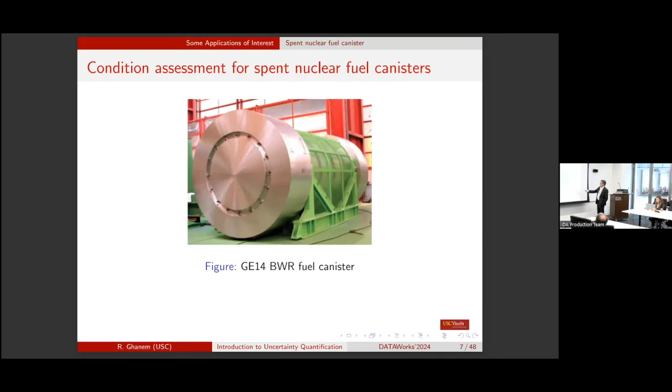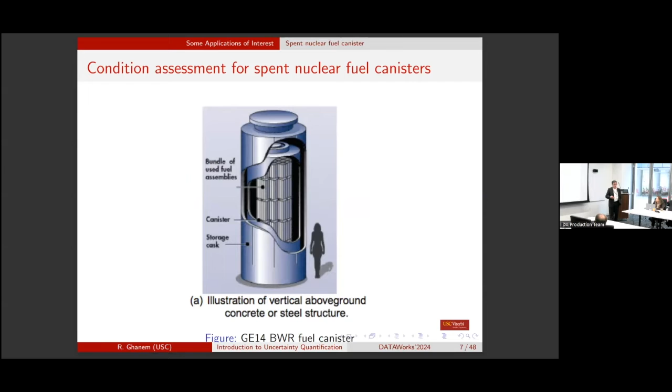This is a fuel canister for spent nuclear fuel. It's about this big. And while it's being transported, it's important to know, before it's stored in salt mines for the next 10,000 years, you do want to be able to ascertain its condition. What does it look like on the inside, right?

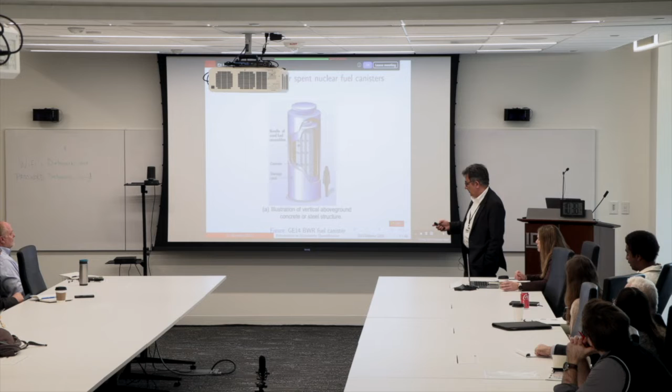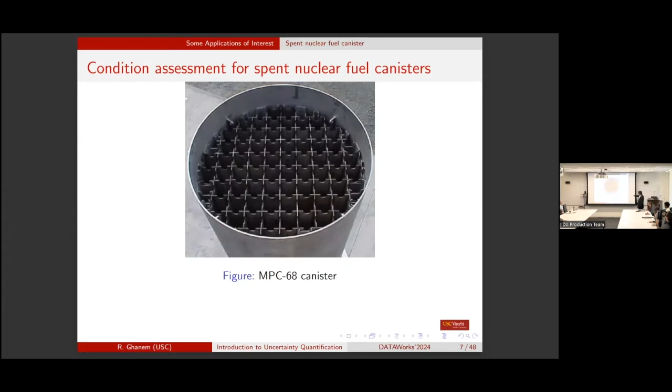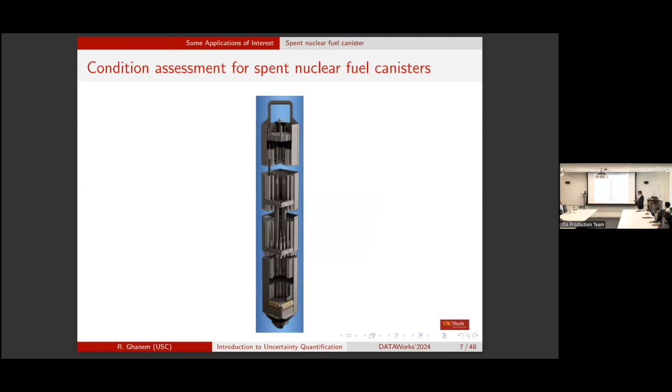This is what it looks like on the inside. This is the canister. There's this basket on the inside, and this grid here; in each of these grid cells, one of these assemblies is inserted, and each of these assemblies has about 90 fuel rods inserted in. Okay, so it's a fairly complex object. You cannot open it once it's sealed, but you still want to be able, after you've transported it, to ascertain the condition of what's inside.

Okay, so you could flip a coin, or you could go to school, get 2 or 3 or 4 PhDs in different topics, or you can listen to this talk. So this is one of the challenges that one has to deal with, that brings out uncertainty about many things, right? But we don't have time to describe those particular things.

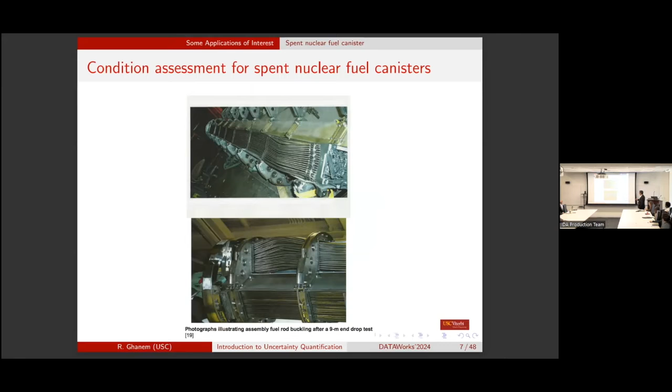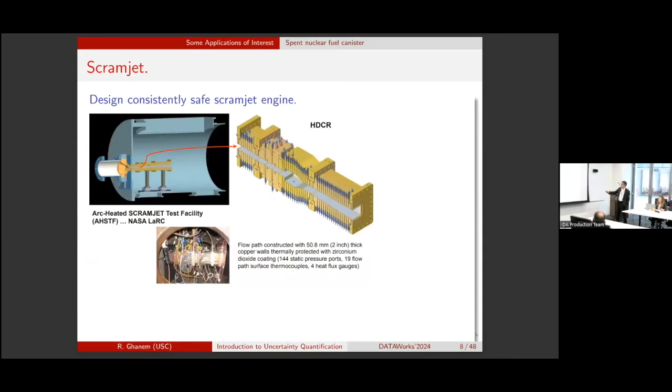But we see this on a computer. You never see this particular shape of combustion in a real engine. What you see in a real engine, this is an experiment, right? This is the model of the scramjet. Flow goes from here, comes out on the other side.

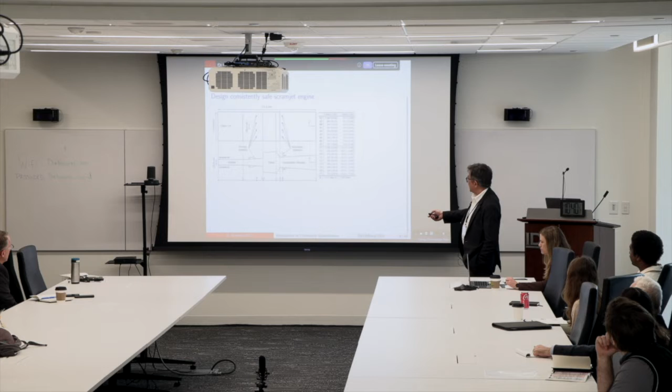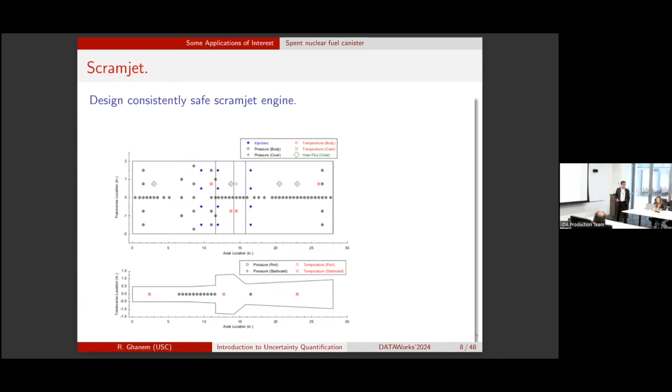It's instrumented with sensors at different locations on top. This is the top view of the sensor locations across and along the length. So we have a very finite number of sensors on the wall of the engine in an experiment. But this is what the flow really looks like.

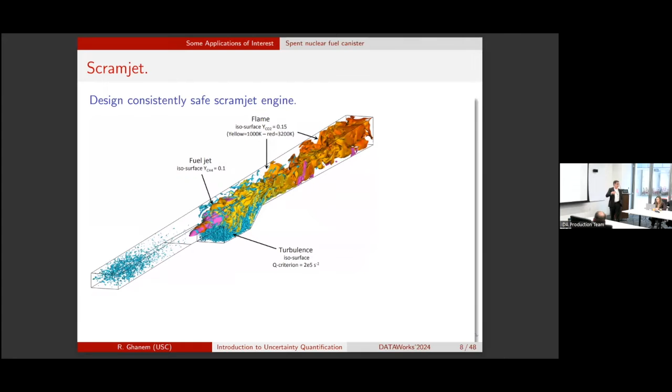And the danger of stalling, the danger of losing thrust, is related to something that happens on the inside, not on the wall. But the only access we have during an experiment is to the wall, right? And if you take measurements on the wall, then the measurements are never the same.

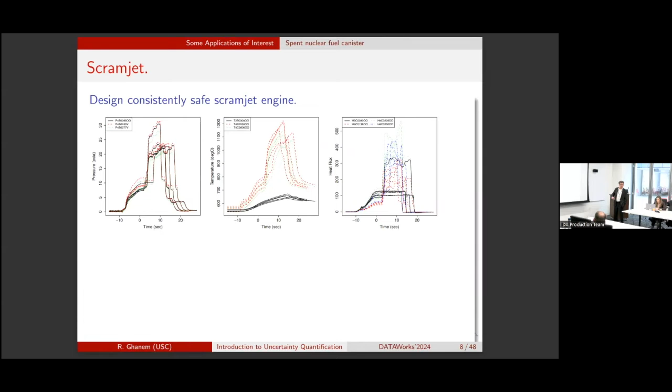There's a scatter in the pressure, temperature, and heat flux measured on the wall, right? So you don't have a single record to reverse engineer what's happening on the inside. There is uncertainty in the measurements you take.

And your objective really is to do a design optimization. You want to find the best shape and profile of the injectors for the engine so that you minimize the risk. So you want to minimize probabilities of bad things happening. You want to minimize the cost of running the thing, right? So you have probabilistic constraints, right, under very limited data. Your data comes from measurements on the wall.

Evaluating these constraints involves running computer models that have hundreds of millions of degrees of freedom, so they take a long time to run. So these are some of the challenges, and we know there is uncertainty. We don't have enough information, but even if we did, it's very expensive to implement any of that into our computational workflow, right?

So this brings the need for reduced models, for scratching your head simultaneously on the statistics side and the numerical side, okay, to enable this optimization under uncertainty, right? So you have one loop here for optimization, another loop for uncertainty, and then each entry in that double loop is extremely expensive.

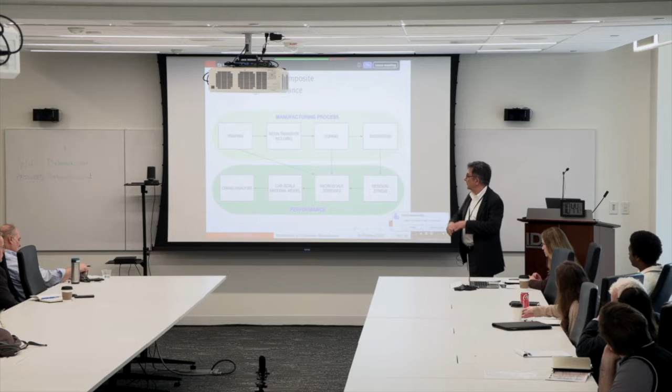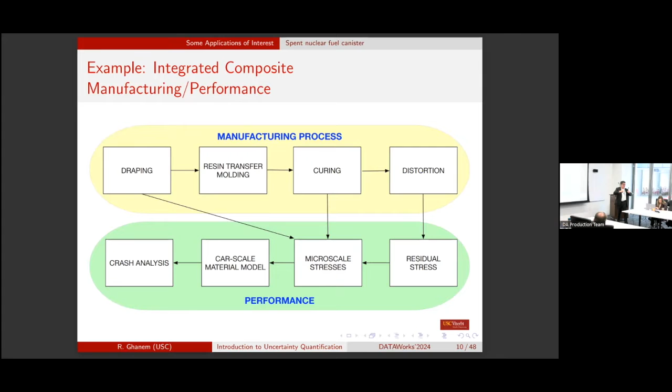And it is these variations that, as you inject this, the resin is going to sort of try to navigate around this heterogeneity and, as it hardens, it will create softer spots that will be magnified as you load the piece. Okay, so that's how the fabric gets. So that's again another source of uncertainties.

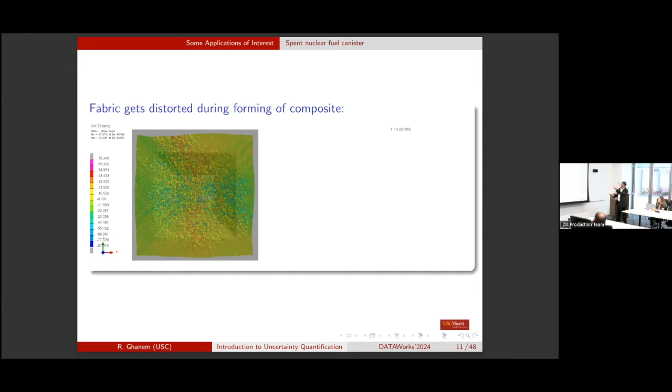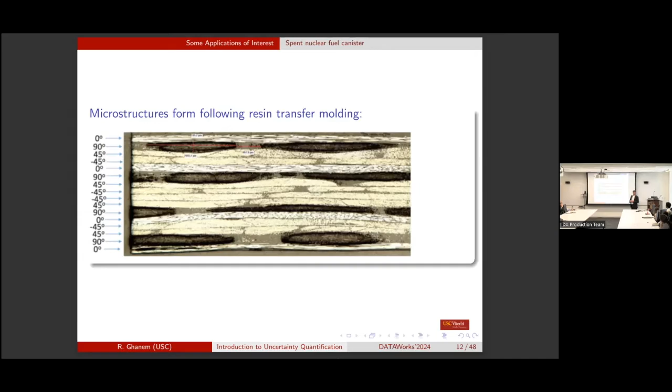And this variability is what has slowed down the implementation of composite material in products that are required to withstand significant impact or force. It's one thing to use composites for the hood of a car. It's another thing to use composites for the sides of a car where you can expect side impact, for example. Okay, so this variability limits the reliability of the products being produced. And understanding how to control it or live with it and mitigate it is important.

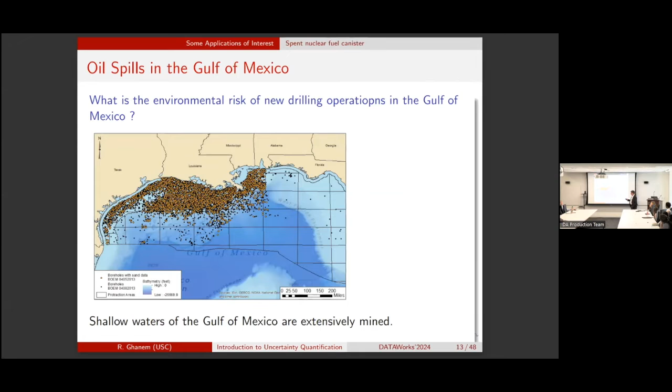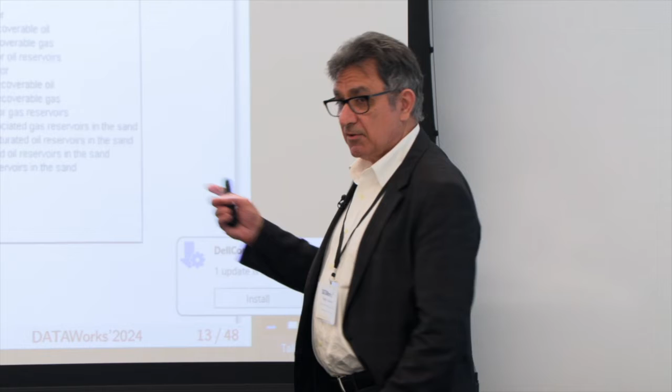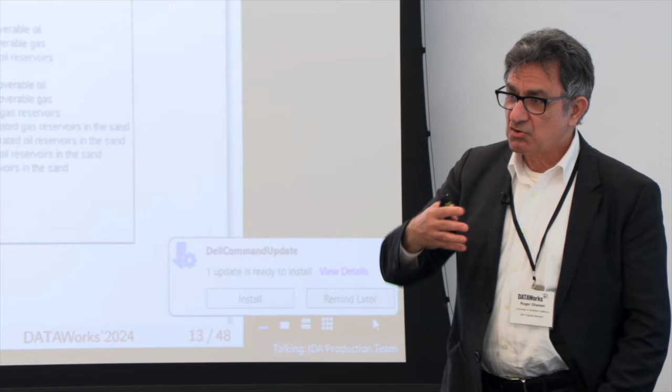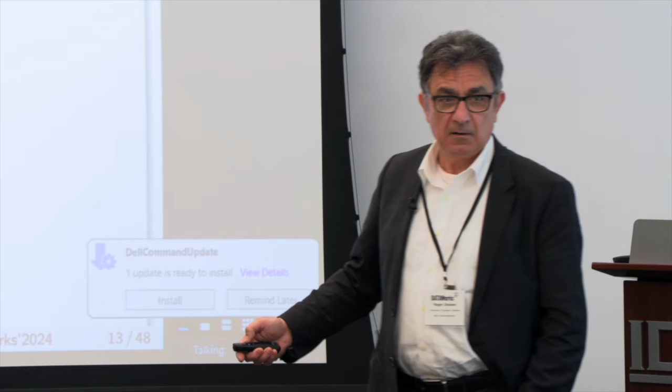The table describes the type of rock, the depth to rock, the depth of water, some geological properties, the color of the rock, things that may seem not very useful, but it turns out that they are extremely useful actually, because it's these additional variables that cannot be digested by a reservoir simulation code. It's those variables that really carry information about geological processes that allows you to extrapolate from a point here to a point here. But we will not get into that detail at this point.

But what's important in this particular application is, given that you have BOEM data at these locations, what can you say about the risk of starting a new well at this location? And these questions became very important after the Horizon, forget the exact name, explosion of 2010 or 2011. So people wanted to assess the risks associated with some of these explorations. And all they have to go on are data from existing wells.

But it's an important topic because, this is the shallow area. All of these are in the shallow water area. And so the shallow water area has pretty much been mined to death. And there's big interest in mining the ultra deep water area. Now, the ultra deep water area is the area over here. We barely have any data. Right?

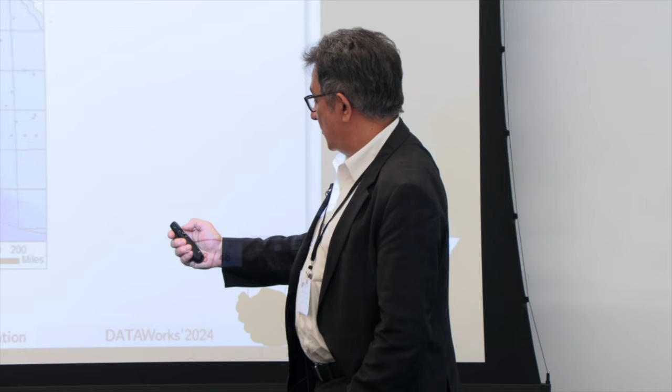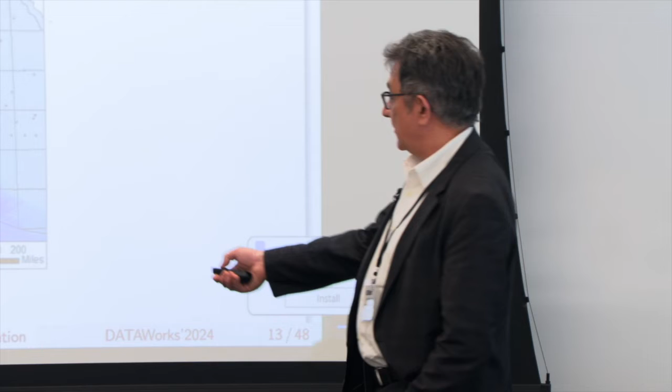So what do you make about mining here? What statements can you make? How can you assure, if you want to buy insurance, how would the insurance price mining in this area? Right? If you're the governor of Texas or Florida, how can you assess the risk to your coastline from mining activities at these locations?

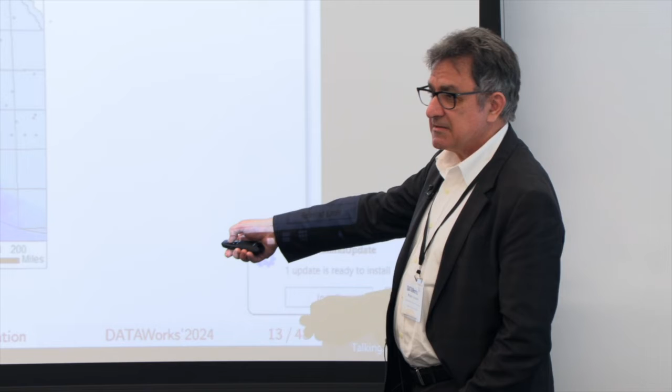Right? So the question is, this was a project we did for BOEM. What's the risk associated in mining away from this coast, given that this is the data that we have? Okay, now, when you first started this, I thought it was a big stretch. Of course, short of a rational answer, they have to flip a coin, because they have to mine in this area, whether we want it or not.

The question is, can anything we know about science, data, engineering be useful in helping, guiding them reach a better answer, right? Even an epsilon better answer would be very useful. Turned out actually we could do quite a bit more than just a tiny bit, and it all lied in the parameters here that we initially thought were useless.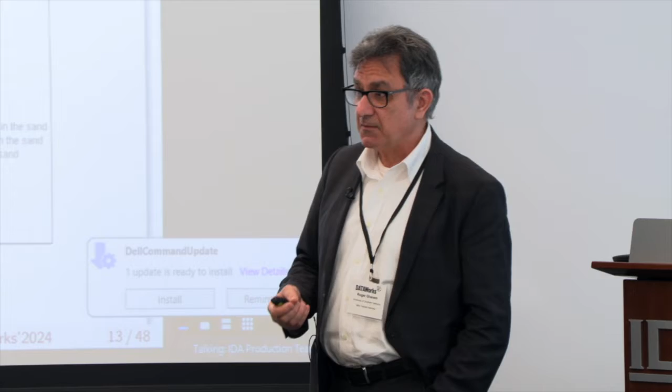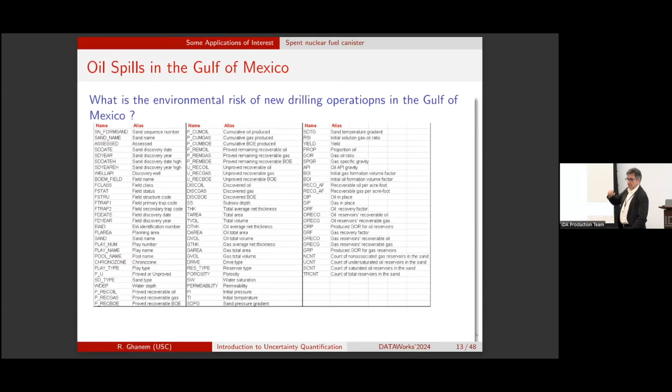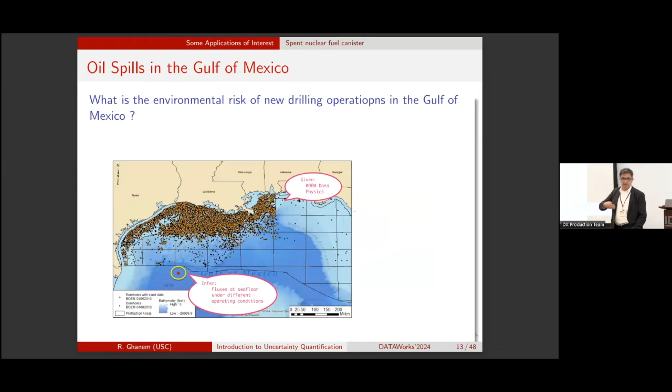Because it's those parameters really that encoded the geology that is not relevant to an oil company. An oil company cares about the immediate neighborhood of a well. And that's only 6 of these numbers that carries that information. Okay, so again, that's an important type of question. This question here is not about a bigger computer. It's about knowing how to read data. So it's actually about data science.

And of course, the cross section of the Gulf of Mexico does not look like this. Okay, this is a caricature of what it may look like, and the oil reservoirs are these yellow patches here.

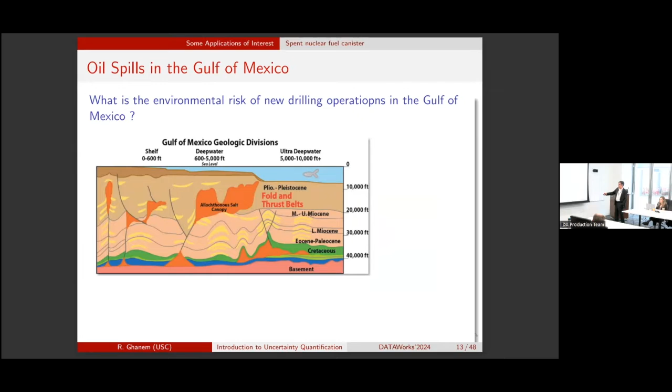Okay. Now another example is an example suggested to me by Kelly. This is Enceladus. It has jets of ice particles of water coming out of it, about 100 jets on the surface, and they know there is potential life in these jets. And JPL wanted to plan a mission at some point in the past, I'm not sure about the details of this, that intercepts the jets and comes back with 2 grams of stuff from the jets. Now, this is not on Earth, it's not on the moon, this is on Enceladus, it's the moon of Saturn.

Right, so you want to plan a mission that goes over there, intercepts the jets, and comes back with 2 grams of stuff. Many things could go wrong, right? The jets may have died by then, right? Or the jets actually change orientation. So there's big uncertainty. It's a very expensive project. Given who we are as humans, I think we will have to do this at some point, right?

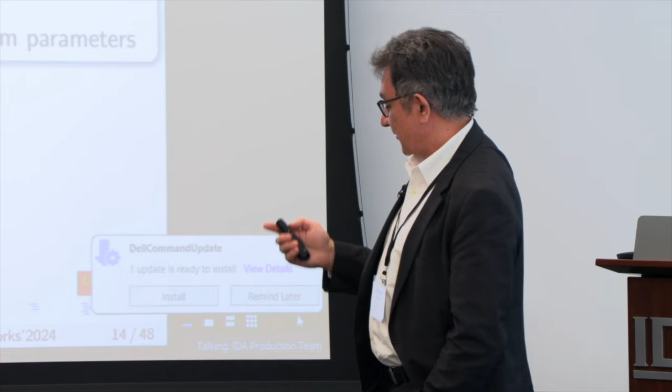But you can imagine the uncertainties in sending something over there to traverse jets that we know not very much about, and to come back with 2 grams of stuff. I mean, it's hard to imagine what 2 grams are, right? But these are problems that we are more and more frequently being faced with.

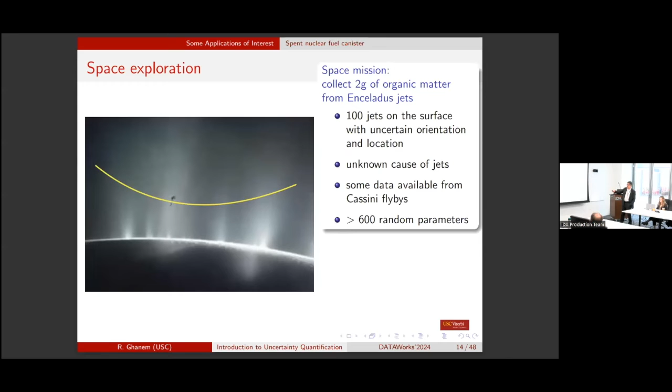Now, you take this, you turn it around. Now, instead of the jets going up, the jets are coming down, and you have a problem of plasma physics, right? So this is a jet of, we're firing plasma onto a substrate, supersonic firing. The distance is about that much. It's not planetary distances. And the objective here is to create a nanometer, micrometer scale layer on the surface of the substrate that would protect, this would be the inside of an engine, that would protect this during hydrogen combustion.

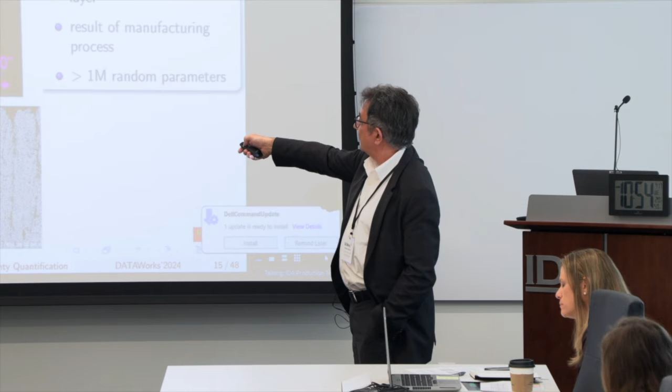And what you want is to create a layer that is very thin, that has some particular morphology, that has these columnar structures, because the columnar structure is going to protect the engine. It's going to actually facilitate the thermal management on the surface of the engine. Okay. Now, we don't know. I mean, you can imagine we have no control over where the particles of this suspension are going to land. It's highly uncertain. And it depends very much on how fast this nozzle is moving in this direction and the distance of the nozzle from the substrate.

Right? And if you end up with a cover that's amorphous, that does not have this columnar structure, it will not be effective at thermal management and at reducing the oxidation process in the substrate. So there are many parameters in this manufacturing process that will affect the life cycle of the engine as it's going through hydrogen combustion.

Okay. Again, the experiments are very difficult to perform. Not very difficult, they're time consuming, and we were able to, this is a collaboration with General Electric, we were able to have maybe 80 specimens. But the parameter space is much larger, is quite large actually. And 80 specimens barely place a point in that large parameter space.

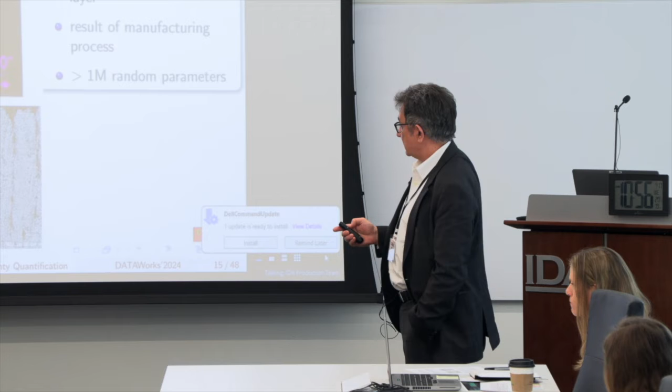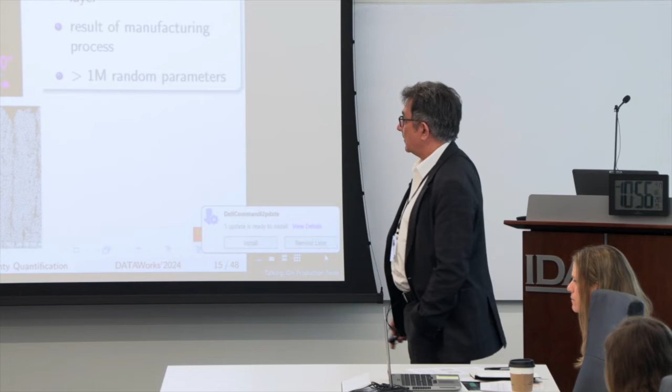So again, here the objective is to optimize the manufacturing process in order to lengthen the life of the engine. And in this case, bigger computers are important. More data is important because the computer models are quite wrong actually in most cases here. They're invariably missing some key physics ingredients. But they give us nice pictures. It's a good prior. Okay, good.

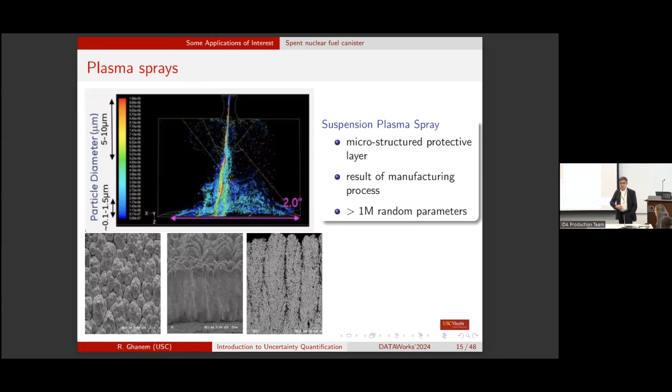So these are the examples. I think they cover a wide enough range to make you realize that uncertainty quantification is not about solving one equation with some random parameters or some random forcing; it's a wide space. The uncertainty comes in many different guises and forms, and the questions we care about are also very varied.

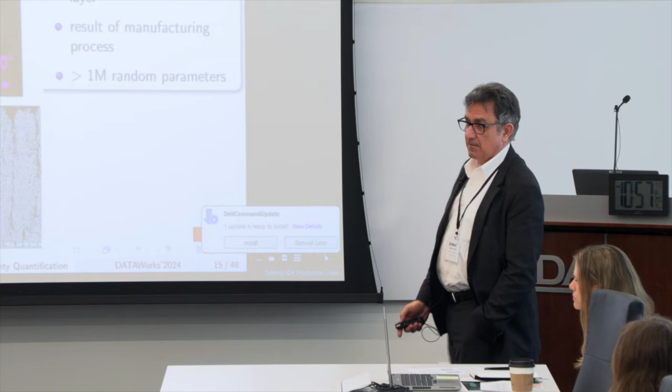So when you scratch your head and you try to think a little bit out of the box, it turns out that, so here I came up with another example, right? So you have hurricanes coming, you're expecting hurricanes, and you're an insurance company. You want to mitigate for hurricanes, right? So you develop, I don't want to scare you, a sigma field, right? A set of events. These are all the possible hurricanes that could come, right? You're an insurance company, so you are planning for future hurricanes. So these are all the possible hurricanes that could come.

And these are all the possible combinations of insurance claims, right? One of those will happen, not all of them. But you don't know which one of them will happen. And you don't know which one of these will happen. But this is really the setting that we like intellectually to think about. There are things that will happen and things that we care to mitigate. Okay? These events we can observe, and events we care about.

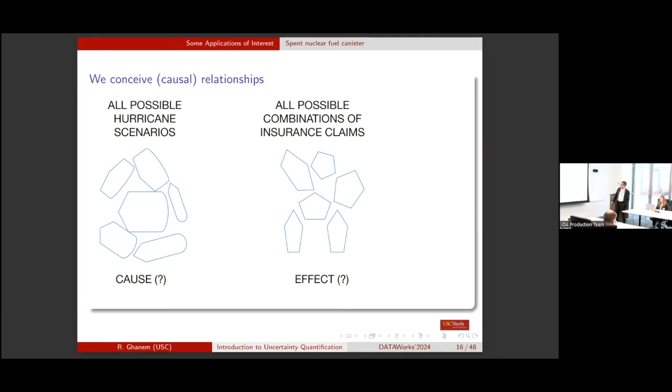Now, very often we invent causal relationships between the hurricanes and the cost, although there may be some other effects that play a role here, right? But these events have not changed. Now, what we add to the mix is we try to think about some relationships that map these events to those events, right? For example, a hurricane comes, we have a certain number of steel buildings, concrete buildings, wood buildings, and you have maps like this that tell you what to expect, or the hurricane has certain wind speed, and it affects different types of buildings of different elevations differently, and that helps you develop some map from here to here and back. So we add this to the list of events we care about, right?

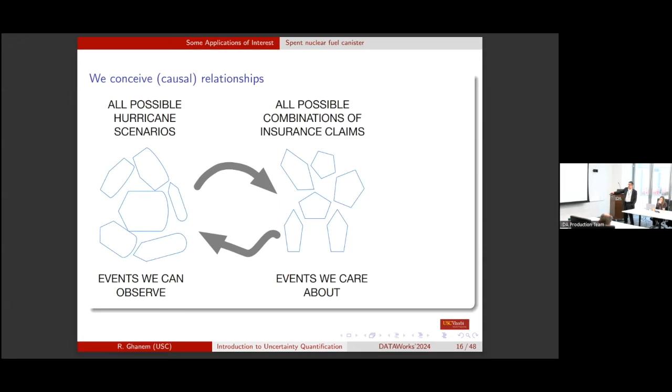But it's still a very complicated map because these events are very complex, and those events could be even more complex. So what we do is we add a mathematical suit, if you want. And instead of the real events we care about, we create a grid, mental grid, if you want, of events we know how to deal with, right? We put ourselves on the real line, for example, or in some Euclidean space, and suddenly we have a grid here and a grid here.

But by putting the grid, by grid I mean we limit the set of events we want to consider. We eliminate things, and these are not tail events. These are things we are no longer going to consider. They are completely out of scope of the models we end up dealing with. Okay? And those could be very important events that you have ignored. But we almost never consider these things that we left out. And we end up mathematically dealing with nice sanitized models that we call mathematical models that we work with. And this is the starting point for most of the research and technology and everything we do in uncertainty quantification.

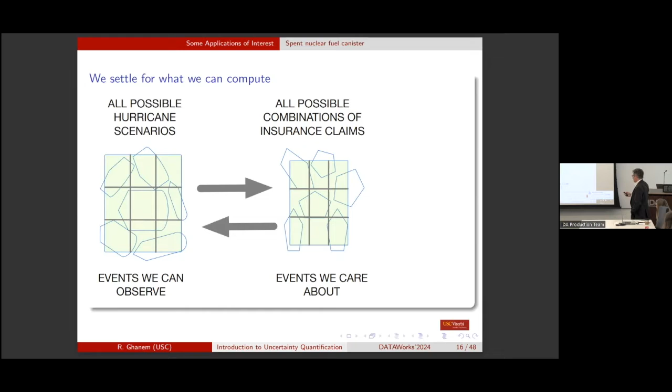Now, there's hope with new paradigms in AI and machine learning that have not been corrupted by the way we do things, that maybe they will pay attention to some of these things because they are not limited by the Cartesian way of thinking that we tend to follow. But we have not started that path yet. Okay, good. So I think these are important challenges if you're trying to deal with problems where the consequences can be very significant, right? The things that you omitted from the book.

All right. Sorry. I tell my students we're professors, we love to talk, and sometimes I forget the time. We're still good on time.

So a modeling perspective. So given everything we've described, let's think a little bit about some modeling challenges. So we'll come back to this. Okay. And I call, given that you fix the model, right? If I'm interested in bending this, and I want to know under what force I'll break it, right? I can describe it using a beam model, which is the simplest model I can come up with, right?

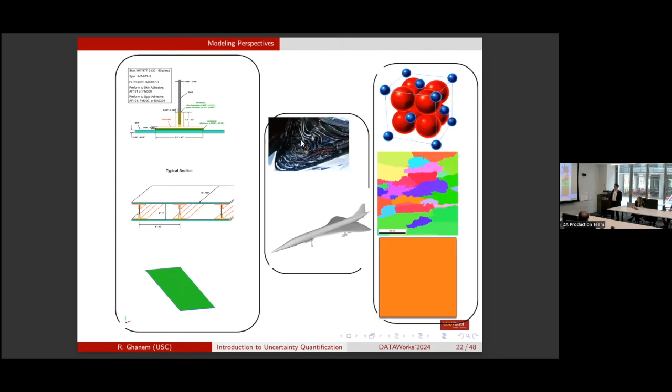So from this, we observe one important thing. It's not just uncertainty that is not a property of things. Mechanical properties are not properties of the material, but they are properties of the model you have of the material. If you change the model, your list of mechanical properties will change. So apparent randomness in these properties could reflect deterministic subscale variability.

Again, this is similar to saying that the randomness in the coin flip is simply because I was not looking at whether I had a head or tail to start with. The subscale variability for the coin flip was adding more observations about whether I start with head or tail. And if you want to add more subscale variability, then you observe the coin rotating in space. So as we add more information, we're looking at subscale in many cases.

Okay, so uncertainty in the parameters could be due to either modeling or to specimen variability. And it is this interplay between scales and uncertainty that leads me to think that the separation between aleatoric and epistemic uncertainty is not very constructive, not in an engineering setting at least. Aleatoric uncertainty refers typically to problems where you know the model, but the parameters are random. And epistemic uncertainty typically refers to problems where your knowledge itself is uncertain, and your model itself may be variable.

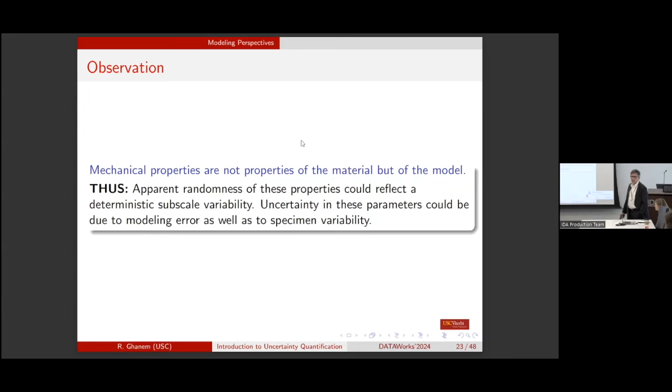You have distortions that you have to describe. You have advection, you have diffusion that you have to describe if you're trying to describe how a real mass is governed by physics. So probability laws are much more forgiving than physics laws. As long as you're not violating these two things, which are very hard to violate, you're fine. Okay? So we have a lot of flexibility for modeling with probabilities.

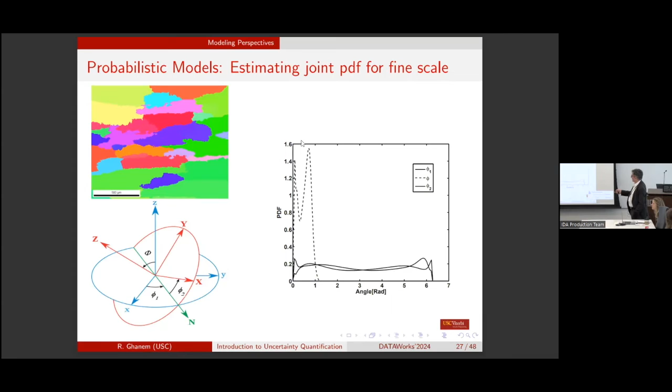Then the behavior on the coarse scale depends on what happens at the micro scale. To characterize these variables, I would have to perform experiments at this scale to characterize the distribution of those finer scales, which would involve computing the Euler angles, the orientations of the crystals within each of the grains. That would give distributions like these. Here I'm showing just the marginal distributions, but from enough data you could plot the joint distributions of the 3 Euler angles, and that would give you the distribution of the etas.

And f in this particular case is again something similar to Newton's law. You have conservation laws that relate what happens at the small scale to what happens at the big scale. Now, this here is not a challenge. This is a silver lining for many problems.

And that is that, even though we know how to characterize things at the atomistic scales with billions of degrees of freedom, in most cases the things that matter are very simple. We may have 3 or 4 or 10 of them, much simpler than the way atoms and quantum states move. So in many cases the quantities of interest are very low-dimensional on the coarse scale, and the analysis at the fine scale exaggerates the complexity of the problem. We end up solving complex problems just because we know how to do it.

It has always amazed me that many climate simulations have very heterogeneous pictures on the globe with things moving up and down, and at the end, the plot that makes it to the reports is a simple plot. It goes up like this. So if one cares about a simple result that behaves in this fashion, there may be more efficient ways to deduce that.

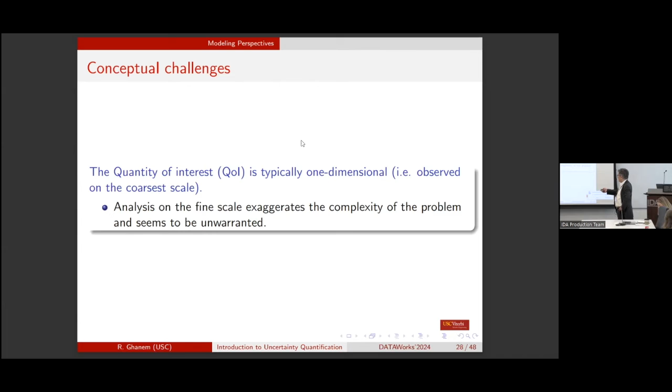Okay, and we do have some time to, I'll be getting back to that in a little bit, actually.

All right, so another observation, this idea here of writing k as a function of etas, it's something that most of you have seen in your elementary class on probability, right? You're all familiar with chi-square distributions. A chi-square distribution says that a chi-squared variable is the sum of Gaussians squared. You're all familiar with a t distribution that says that a t random variable is a particular function of Gaussian variables, a ratio of a Gaussian to a chi-squared variable.

Okay? So we do have forms like this, simple forms, squares, finite sums, ratios, that we work with on a regular basis as part of standard statistics. But what we need to do now is be able to generalize this away from that limited list of tabulated distributions to problems where the function f is really problem dependent and describes the physics and the data of the problem.

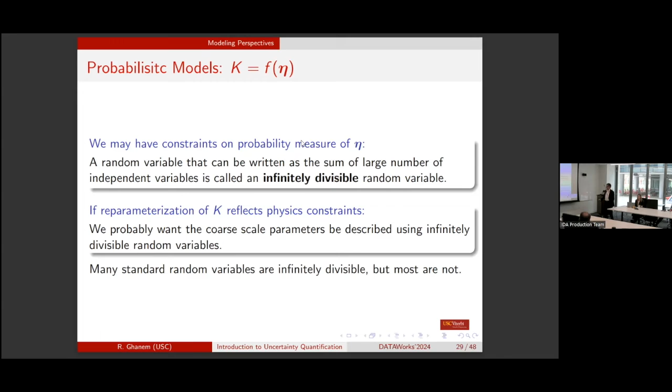Infinitely divisible distributions. This says effectively that it's not physically realizable to think of a material property as having a uniform distribution, because uniform distributions are not infinitely divisible, and most material properties are really the aggregation of things that happen at a finer scale. So if you were to test material properties in a lab, you will always observe a tail for those distributions. They will never have a sharp cutoff like this. But you can reach a similar conclusion based on more logic-based arguments as opposed to experimental arguments. Okay, good. That's all I have to say here.

Okay. So we're going to move now into a few specific constructions that we've worked on in the past few years that leverage the challenges and perspective I just described for you. And these probabilistic or uncertainty models leverage structure and the data and the physics for describing uncertainty. And I'm going to talk about 3 different classes of models. One is switching diffusion. So the other one is polynomial chaos expansions. And the third one is probabilistic learning on manifolds. So now we're going to get a little bit more specific with the technical approaches that we try to pursue.

So switching diffusion, the idea is very simple. The idea is that there's something happening on top, right? And one is justified in thinking that every now and then there's a different dynamics that happens on top. And the cause of this switching between these dynamics lies underneath. We don't see it. So every time something underneath switches colors, something above is switching behavior. Okay. Now this is typical of hidden Markov models, for example, except the difference here is that there's a relationship between what happens under here and what happens above. So they're related to each other.

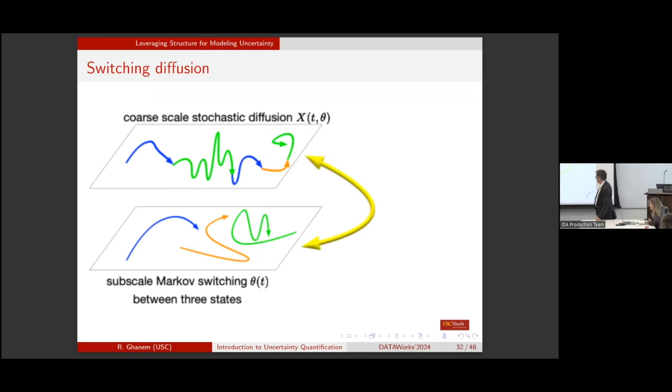But the thin slice still lives in the big cube. It doesn't live in a small cube. It's a thin slice in the big cube. Right? Feel free to follow up offline. Okay. Good.

By the way, an equation like this, you can always build an equation like this, where mu is called the drift and b is called the diffusion of this equation. You can always build an equation like this with some mu and some b, so that as x evolves as a function of t, x has a distribution that matches the data that you are observing.

So if you give me any data set that you have, as long as it does not have infinite memory, I can describe that data set as a solution of an equation like this by estimating proper mu and proper b from the data. Okay? This is called an Ito equation or stochastic differential equation.

Now, this equation may end up having to lift very heavy weights if indeed these parameters depend on another process. And if you were to extract this process from this equation and put it in a separate equation, then this equation will be running much more efficiently. It will not have to do as complex a task.

So this here is a computer model, for example, that aims at describing this curve here. And this red curve are the states of alpha. So here we have alpha 0 is in this zone, alpha 1 is in this value of strains, and alpha 2 is in this value of strains. And this is the corresponding x. Questions? Okay. So, and this is the coarse scale f.

Right? And once we have this model for alpha and the model for x, then we can generate millions of samples. Solving this equation is very straightforward. It runs very fast, in microseconds. Right? So once we have estimated these parameters from training data, we can generate millions of these samples that describe the behavior at the coarse scale in a fashion that acknowledges what's happening at the fine scale. So it already encodes that behavior internally.

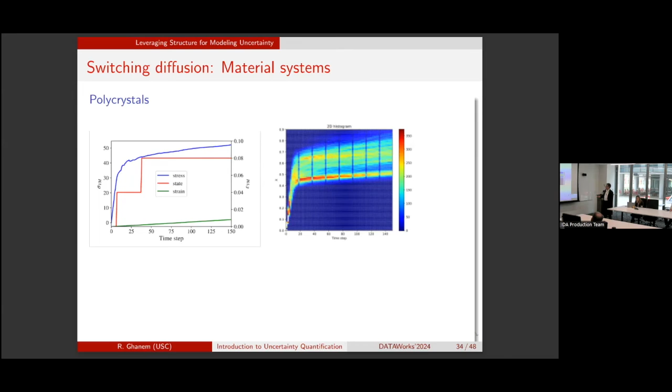And there's some type of oscillation that when you observe is a precursor to unstart. Unstart means the engine dies. So when these guys start to oscillate in a certain regime, you know that something bad is going to happen. But of course, you cannot see this inside a real engine. The only thing you can sense on a real engine are measurements made on the surface. Right?

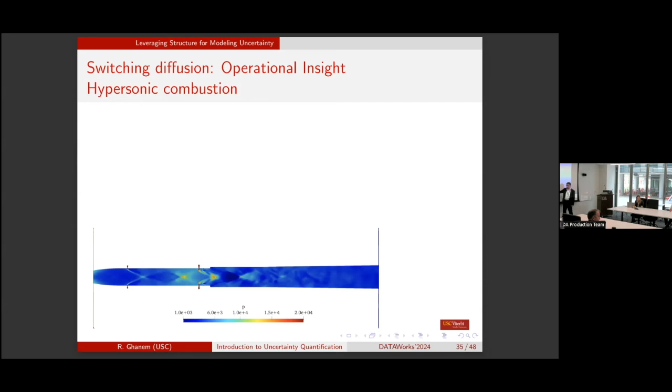So one thing we're working on now is to describe the measurements, sparse measurements on the boundary that we can take during an experiment, as our X process that we can measure, and what's happening in the center as the alpha process, as you switch between different regimes of behavior. And the question is, by observing X, can we infer the alpha? This goes back to this problem here. By observing this, can we infer how much damage is happening

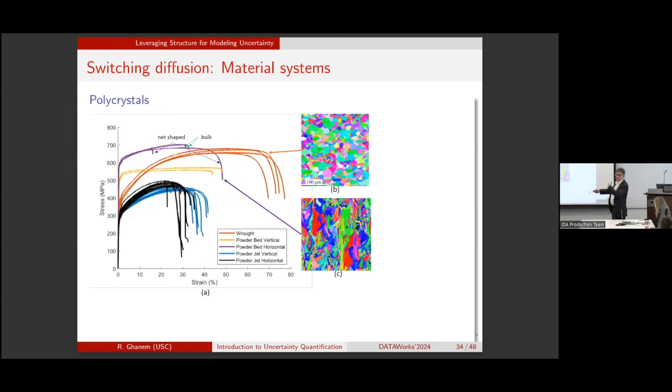inside the material? Translating the same question to this problem here, we want to observe the measurements on the boundary and infer the regime of behavior along the center line. Because we know from experience, from having looked at many simulations, that certain regimes of behavior are associated with failure. Okay. Good. Questions?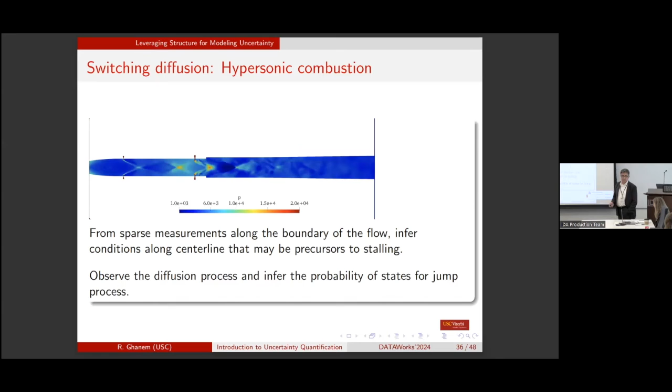Okay. So this is currently an active research area. And this work, by the way, the switching diffusion, was supported by the Air Force, and now it's supported by MURI, also from the Navy.

Active research areas are to switch with a large state space, where what's happening at the alpha state can be in the hundreds of possible states instead of 3 or 4 or 10 states. We are interested in situations where the diffusion model is not just a vector of entries, but is a matrix, has matrix values.

Because, for example, elasticity properties are described as tensors, as matrices. And other quantities also of interest are described as matrices. And we want to condition on what's happening on top and infer what's happening underneath.

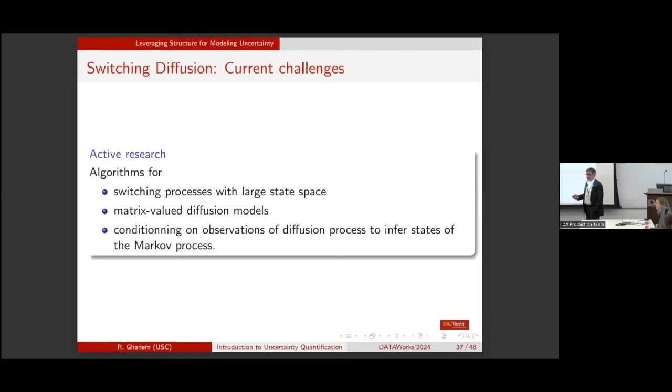Okay. Now, so we're done with the switching diffusion model. The other model that we're going to look at is polynomial chaos models. Now, I started working on these some 35 years ago. Every time I try to move away from them, I get pulled back with new ideas, and they have been the workhorse for most of my research, and they've proven to be very resilient.

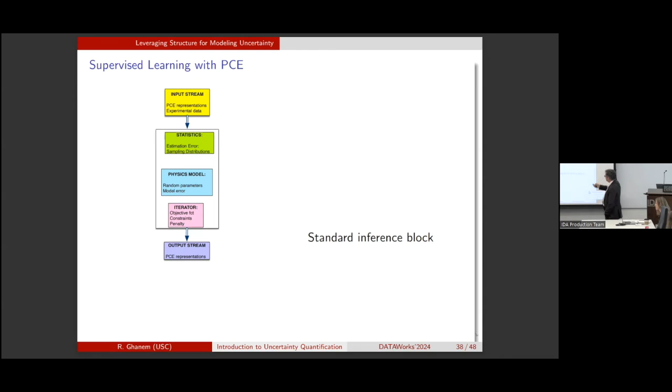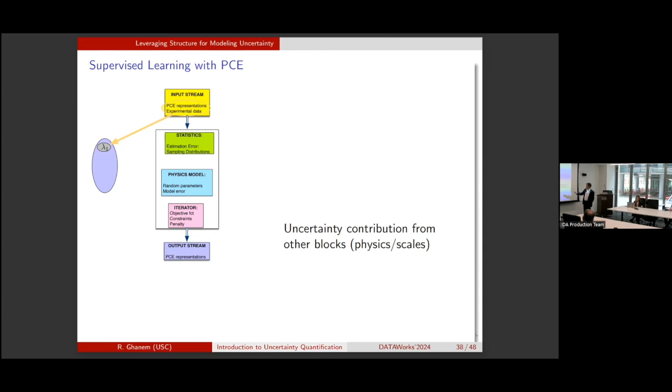So first, the input stream you bring in may have some uncertainties associated with it, possibly because the upstream model itself gave you an ensemble, right? So that brings in one, I call it a stochastic degree of freedom, or one set of degrees of freedom associated with the input stream. Then you do statistical estimation. Because you have finite samples, this brings in another degree of freedom, right?

We all know, for example, that if you have n data points and you estimate the mean of the data points, then the mean itself is a random variable that has a Gaussian distribution, and its standard deviation varies like 1 over square root of n, right? So you have here now a random variable whose strength or contribution varies like 1 over square root of n. Right? So when you do statistical estimation, you're adding uncertainty in here.

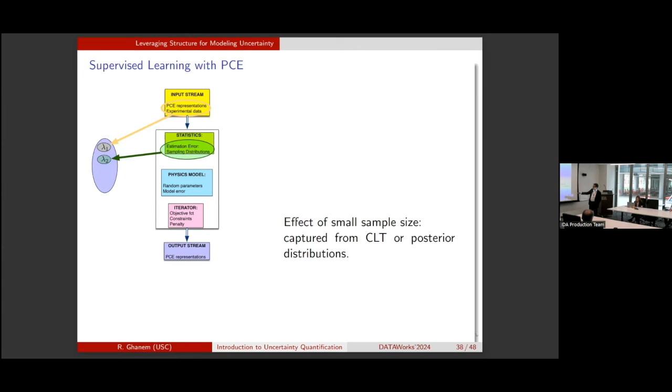Then you bring in a physics model, and the parameters of the model can themselves be random. That adds another degree of freedom here. And you may have model errors associated with the physics model that bring in yet another degree of freedom in here.

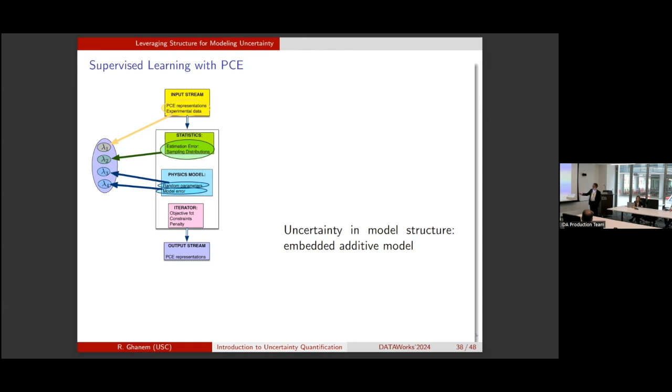Okay, and your output stream then is going to depend on the uncertainties in the input, the uncertainties that you incurred doing statistics, that you incurred with random parameters and model errors. I call all of those Xi, and the output then depends as a function of Xi. And what we want is to be able to describe in some constructive way, some useful way, this output stream as a function of Xi.

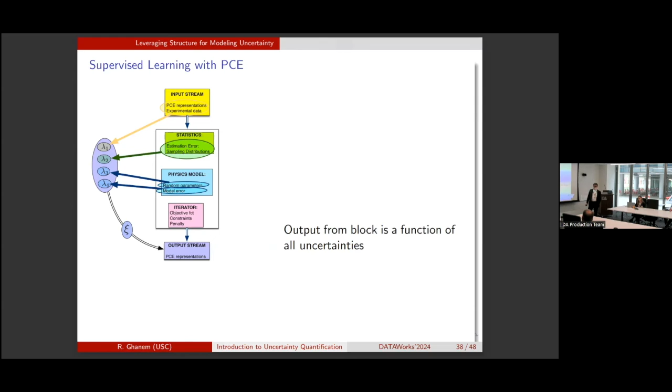Okay. So these are the stochastic degrees of freedom. And quite often, actually, the physics model is not just one model, but it's a network of models. So you collect these stochastic degrees of freedom for all the models, and you put them in a reservoir of stochastic degrees of freedom in here, right? And the quantity of interest is Q, right? So that's how it works.

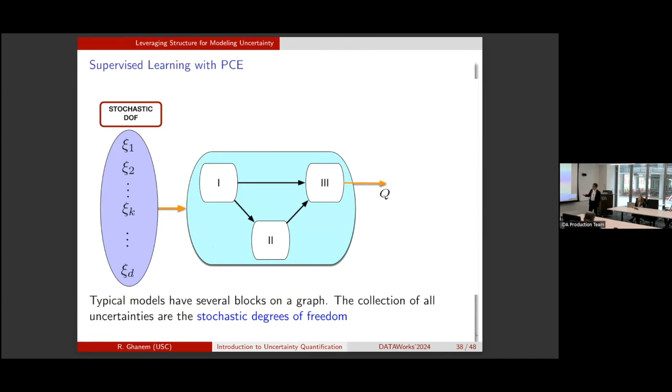Now, I'm going to replace this block here and a little bit more. If you actually try to implement this, what you discover is that first you take these stochastic degrees of freedom and map them into an input deck for your simulators, right? So these are the input parameters that go into the input deck of the simulator. And these input parameters get mapped through whatever simulations you have to quantities of interest, right? So this path here, going from these degrees of freedom to the parameters P to Q, is the path that follows physics, whatever simulations you have.

And you can call this the training set. What you want to end up building at the end is a map that takes you from these directly to this. Because this map is the map that you will use in solving these very expensive optimization problems. Right? This map here, every pass through this is going to require you to build the input deck and solve the physics problem. This path here, once you've calibrated this path, completely bypasses the physics.

Okay, so in today's language, you can think of this as a neural network model, perhaps. But for many of the applications we run with, the requirements are about 0.1% accuracy. We cannot afford the 10% accuracies that you achieve with neural networks, right? So this learning process has to be very meticulous. Okay. So this is what we want.

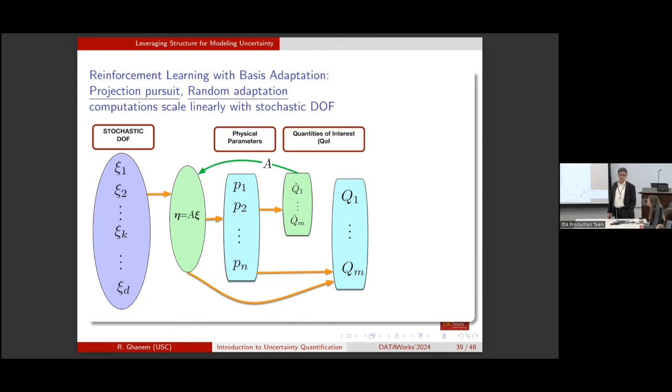Okay, good. So the last component of the work is probabilistic learning on manifolds. And the first time I worked with this was on the problem of the oil wells in the Gulf of Mexico. Actually, about 10 years prior to that, maybe 15 years prior to that, I had met

Yannis Kevrekidis, who told me a little bit about diffusion maps and work he was doing on diffusion maps. And it took 15 years for me to understand what he was saying. But eventually it clicked, and turns out that those 200 parameters in the table that I showed you, from one table to the next, to the next, to the next, well, if you look at them properly, they do delineate some structure in 200-dimensional space. They are not placed at random in 200-dimensional space.

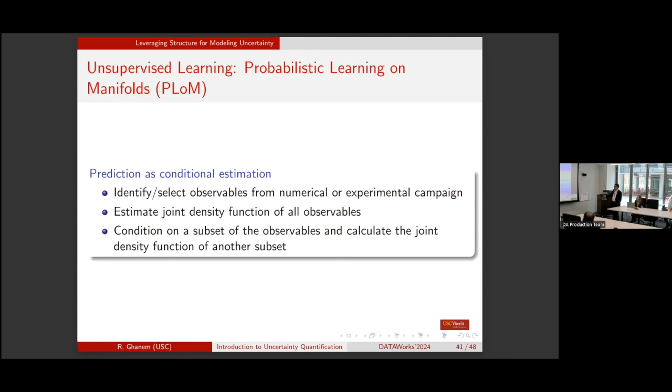So prediction as a conditional estimation. So what we want is to identify, select observables from a numerical or experimental campaign, estimate their joint density function, okay, and then say, if I knew the value of one of them or a subset of them, what can I say about the other subset? Right? That's standard. Right? The challenge is, in many cases, the data is offered to us in this form.

We have a table where each row is an experiment, a sample, and each sample has that many features, number of columns. Okay? So you train on a sample, and then your objective is you break the number of columns into 3 groups, at least we do. One group, W, are values that we can specify during operation. The Q are values we want to predict during operation.

And the U are values that we could only observe in controlled settings. We don't care about predicting them, and we cannot observe them, right? But they are valuable for training because they give structure to the thing you are learning. Okay? And then during operation, you specify W and you want to predict Q.

And you can imagine that if you have this ability to specify W and predict Q, then this can become the engine inside an optimization. As you're iterating with the optimization, W is your control variable, Q is your objective function. And then because this is a distribution, it's fairly straightforward to estimate probabilities on Q and not just numerical values. So calculating probabilities of constraints becomes also feasible and possible.

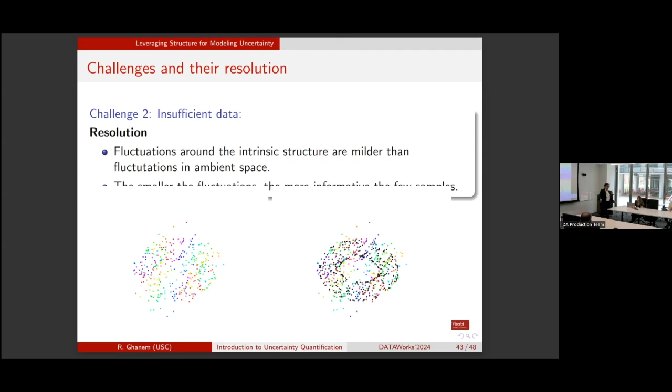So that's really the idea. You start with few samples, you discover a structure from those few samples, and then you generate more samples on that structure. And once you have more samples, you are back to this formula, and you can do this formula effectively.

Okay, so we call this probabilistic learning on manifolds. The first step is to estimate the density of your small data set. The second step is to discover a manifold, and we use diffusion coordinates to characterize the manifold, and it embeds the manifold into a vector space. Once you have discovered that manifold, we generate millions of samples restricted to the manifold. So the new samples share with the old samples the kernel density, the probability distribution, and the location on the manifold.

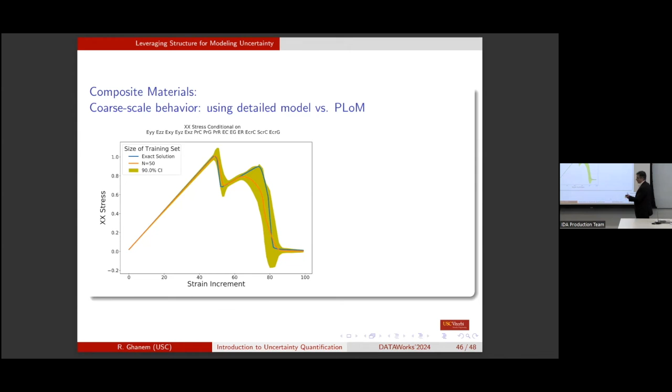The blue curve is an exact solution from finite elements. The band that we compute here is the probability. Remember, we condition on a subset of variables, and you predict the distribution of the other subset, not the numerical values, right? So here we're conditioning on the values of the fibers, what kind of fibers we have inside the composite, and we're predicting the distribution of the stress-strain curves. Okay. So this is an example of the kind of predictions you can make with that.

As a conclusion, uncertainty is changing its form and content as technology changes. The rules of probability are the same. There are 2 or 3 rules, and those don't change. But what we can do with those rules, the packaging of knowledge we can achieve with those rules, is changing, right? And it has to change because technology, science, and mathematical knowledge is changing. So perspective mathematics and algorithms are keeping pace with technology and these requirements.

And in my mind, one interesting and compelling objective is to reverse engineer the central limit theorem. Everything we learn in statistics is you apply the central limit theorem and you go to infinity. Well, we never have this. We're facing problems where we have very limited data, but we have the multi-scale, multi-data capabilities to explore. Instead of plotting a density function, we know how to describe uncertainty in terms of parameters that lie underneath, and we have the capabilities to chase the uncertainty down to wherever it's hiding. So I think this is an interesting closing point of my tutorial.